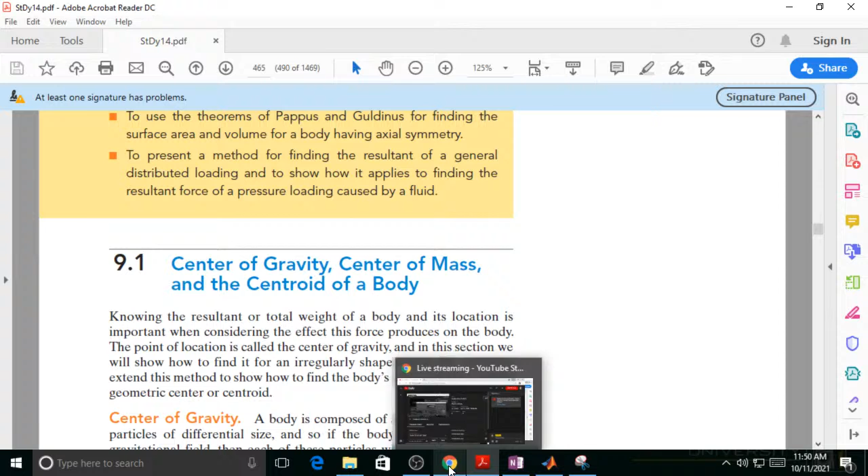I had a question about my degree works. So I need one more technical elective, but I'm also a nuclear associate, and I still need radiation health physics. Will they work together? So in that case, I was thinking of taking radiation health physics and alternate energy systems to get the technical elective, so I don't have to take alternate energy systems then? Okay, wait a minute, let me show you. Is it an engineering or technical elective you need? I think it's an engineering elective. Well, if it's engineering, it'll work. But if it's technical... Here's the deal: if you've got enough for your engineering electives covered, then what you need to do is talk to Crone, and it's possible. I need to cut off the microphone for a second. Okay, that's fine.

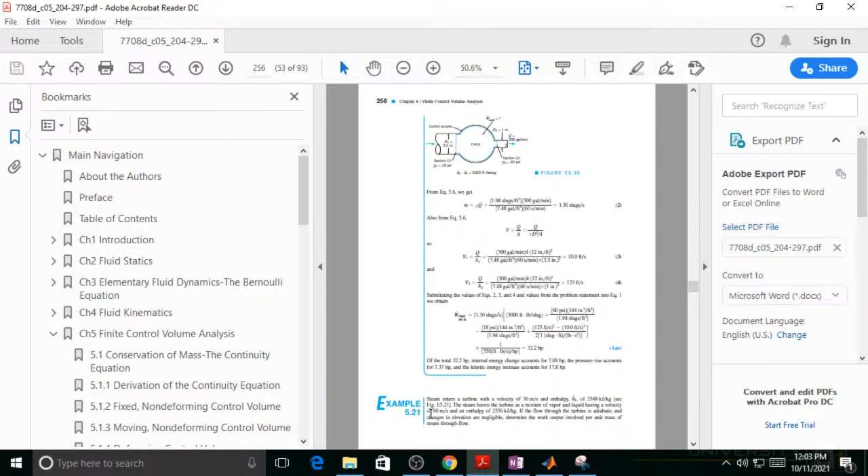I got kind of conflicting signals about when. Initially they published the final schedule as one thing, and then it got switched to something else. So my question is, what's the current final schedule?

Let's do this. Here's the exam schedule, so it can't be different than that. If you look at the exam schedule, it says blah, blah, blah, lots of blah, blah, blahs. But it looks like it's December 2nd, 3rd, 4th, 5th... oh okay, that must be Monday and Tuesday.

So I think I did it. Okay, now wait a minute. Okay, so that's online classes. I went ahead and did it for the 7th. But I may move the midterm back a few days.

I was afraid it was due this week or next week for midterm stuff. No, what I'm gonna do, I'm trying to be flexible because I don't know what's going on. I think the cases are getting better, but I want to try to be reasonable. At the same time, near the end of this week I'll start sending weekly emails with your status, what you haven't completed, and what you need to complete. That'll help people realize, oh, I better get doing something.

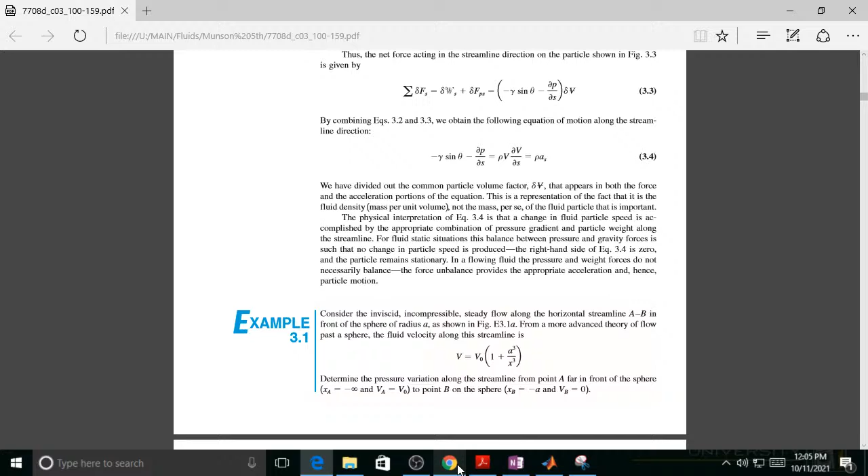I can do a problem or two, or I could tell you what I could do. I could go straight to the Blackboard site and address the problems you actually have assigned. But... oh no, don't make me do that. Oh, thank you.

This is this fall, this is... there it is. Go all the way down. I don't know where I put this at, so let me just hit 7. No, that's not it, that's the curved gates. Did y'all get through the curved gates? Okay, so let's see, that is 7. Content 8.

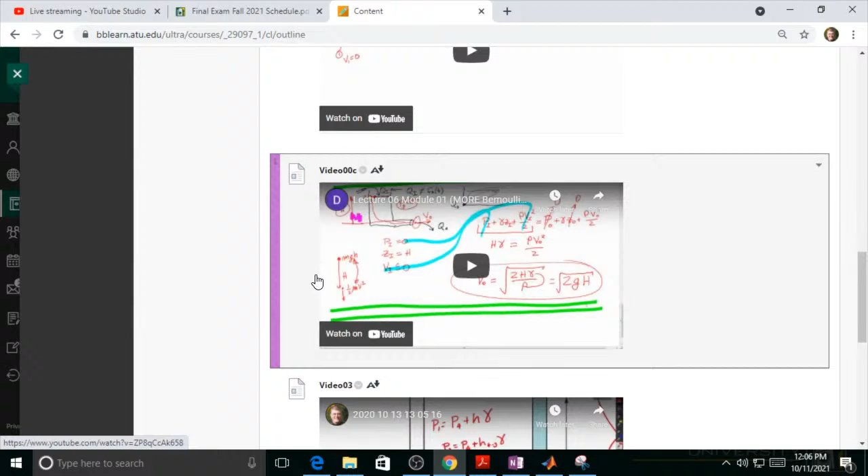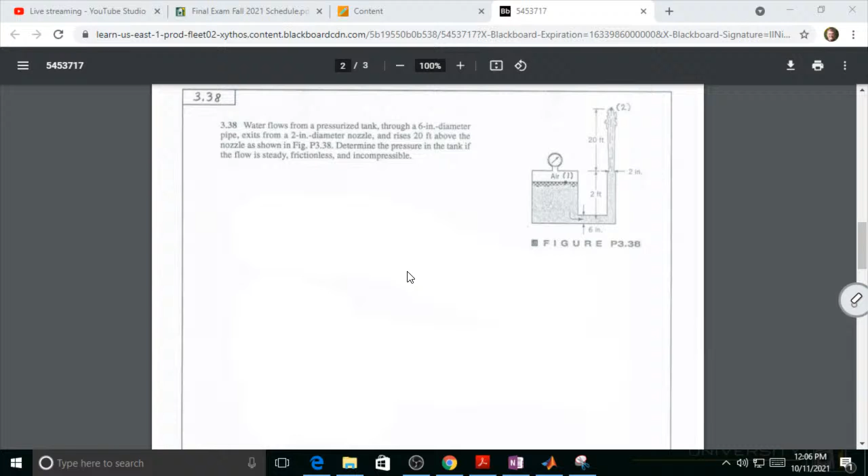Yeah, there's Bernoulli's equation. Let me go to the bottom. Look at this one, I'll just do a quick rundown. Let me see if this works. Oh it does, okay. Now how do I erase? Oh good, so instead of copying this over to OneNote, I'm going to write on this. It'll disappear when I'm done, but hey, this might work pretty good.

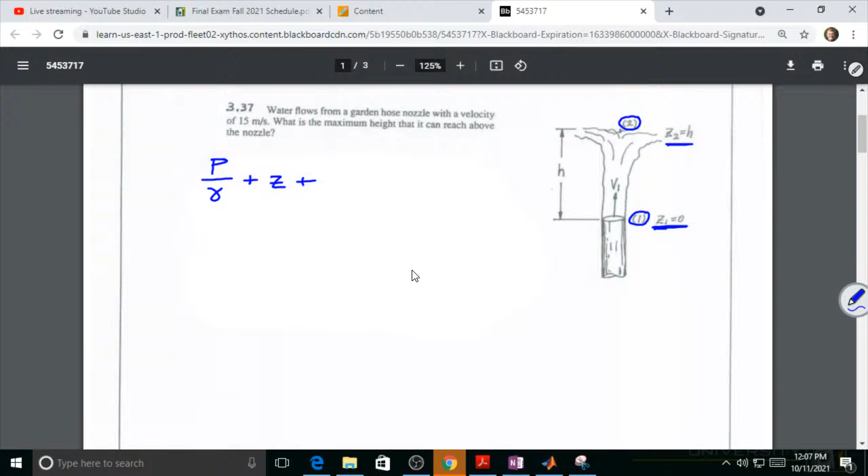Okay, so let me give you a rundown on each one of these. Of course, there's point 1, he's identified 1, and he's identified 2. The facts you know at 1, here's one fact you know at 1, and here's another fact you know at 2. So if you look at Bernoulli's equation, it looks... okay, so the ink, I can't change the thickness of the ink here. So if you write it like a civil engineer, I'm trying to write slow but it seems to catch up. You actually have 3 things to know.

Let me write it and then put the subscripts after I finish. Okay, so 1, 1, 1, 2, 2, 2.

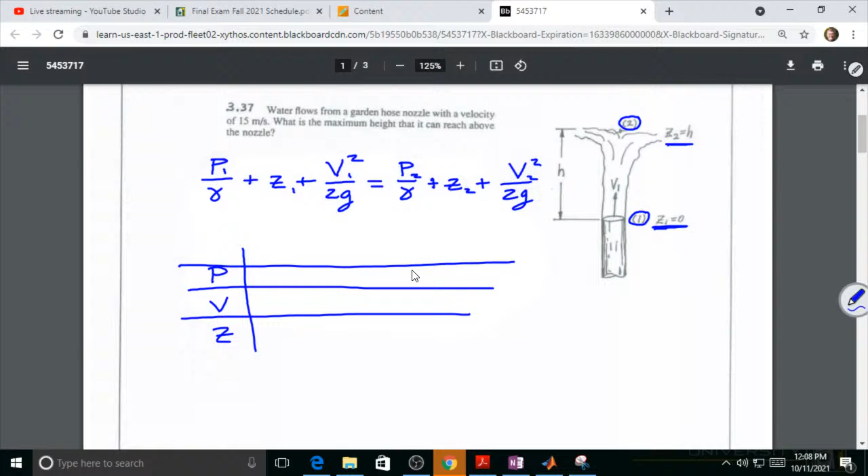So this is one thing that's kind of helpful, for me at least, and I've heard other people say the same thing. If you make a table, let's say you had 4 points in there, we'll run across one where there's that much.

If you start looking at it, number one, or location one, you do know the pressure there. He tells you water flows from it with a velocity of 15. So you do know that one, and you do know that one.

At 2, you do know the pressure. You do know the velocity, actually, but you don't know that. So in actuality, you've got one equation and one unknown. What you know about 2 is the velocity sitting here at the top is like it's bubbling around, and it's not going up or down. It kind of goes off like this. So you got that, you got this, you got that.

Both pressures are outside and exposed to the atmosphere. That's supposed to be a 2. It looks like a 2. You have that. So essentially you have Bernoulli's equation where you know this.

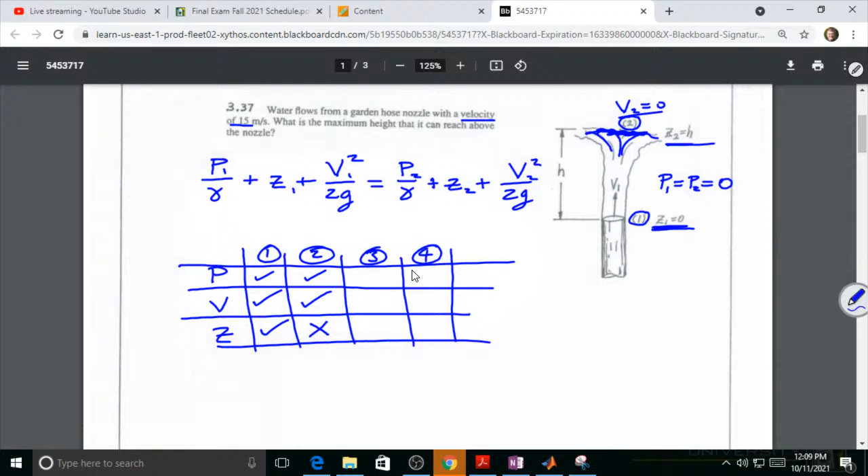That's the P1 at the time. You know that. You know Z1 because you've made your datum right here, and that's going up. You don't know this, but he told you this one. And you wouldn't ordinarily know that, except that somebody told you that. And you do know that.

So the only thing you don't know is this one, which is how high this thing bubbles up to. This is a pretty standard problem because it's essentially a fountain. How high does your fountain go? And that's pretty much it.

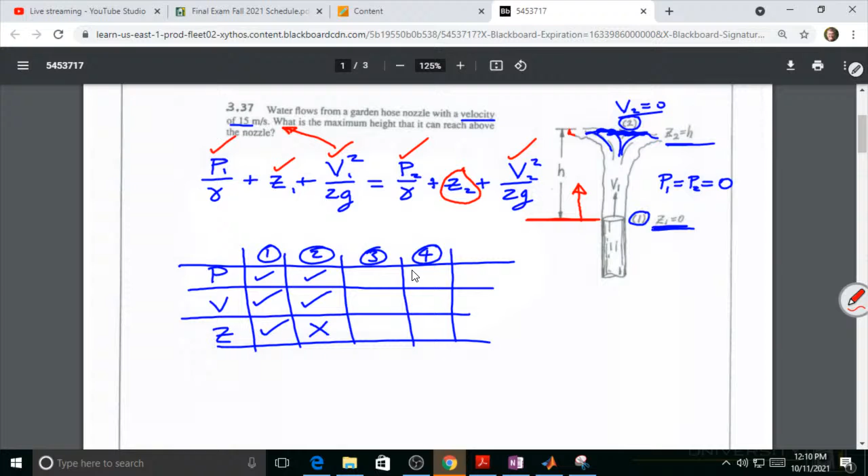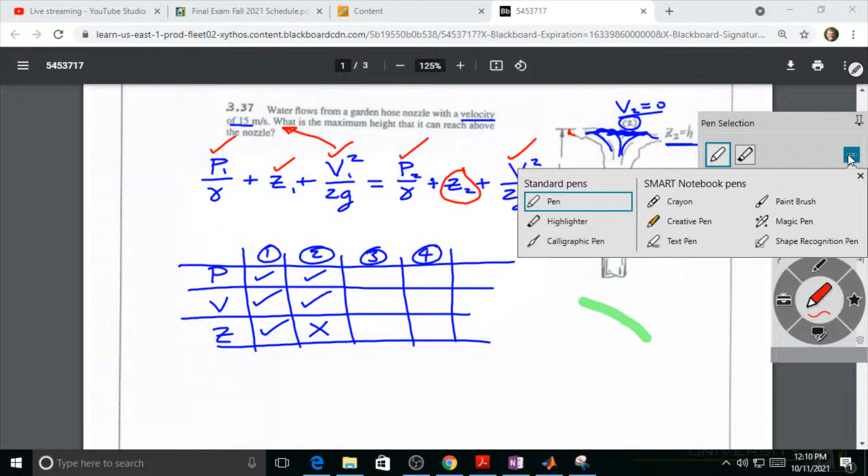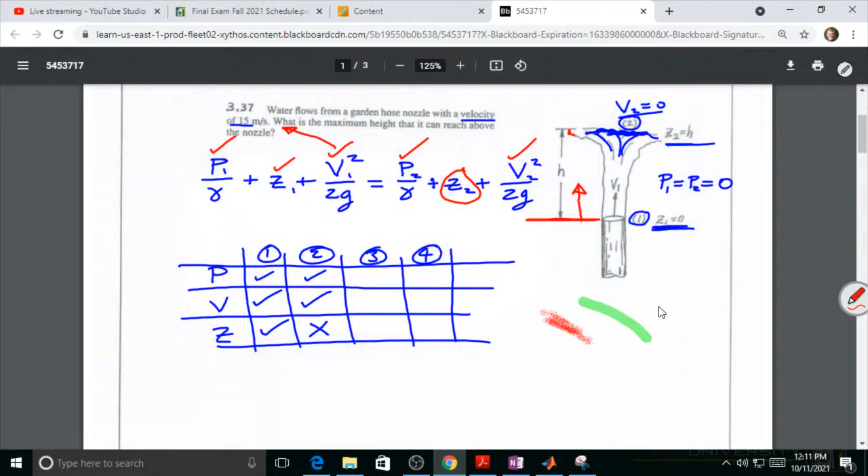What does this thing do? If I click that, what is that? Is that an eraser or a highlighter? Oh yeah, you're right. Okay, and there's some dots right there. Oh, calligraphy pen. Oh, a crayon. Oh, that's funny. We'll just stick with a pen. I didn't know it had that. And they got other things here too. Now I can't get it to go away. There you go. Can I just go to the next page? Oh, it gets stuck on the screen. Okay, so I've got to erase it. It does have an eraser here. Okay, so I'll go to the next page with a clean slate.

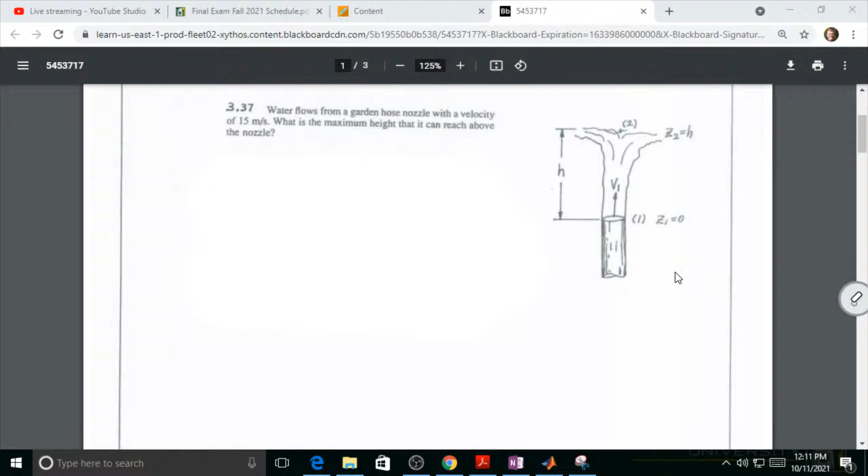So this one's a funny one. Let's overdo it. What I mean by overdoing it is this. So he identifies 1 and 2. I'm going to over-identify it and say 3.

You could do Bernoulli's this way, or you can do this. So both of these are the same. I'll say that's constant 1, and this is constant 2. But it turns out the only difference is you just multiply the top equation times gamma, and you get the bottom equation. So you can do either one.

But the key is, in either case, you'll have to know P, V, and Z. And you've got 1 and 2 and 3. So it's kind of helpful to make this table right off to see what it is you have to do.

Okay, so I haven't even read the problem yet. I know it's the section on Bernoulli's equation, so I know I'm dealing with Bernoulli's equation. It says water flows from the pressurized tank through a 6-inch diameter pipe, exits from the 2-inch diameter nozzle right there, and rises 20 feet above the tank, above the nozzle. Determine the pressure in the tank if the flow is steady, frictionless, and incompressible. Frictionless means there's no losses, so I can use this Bernoulli's equation.

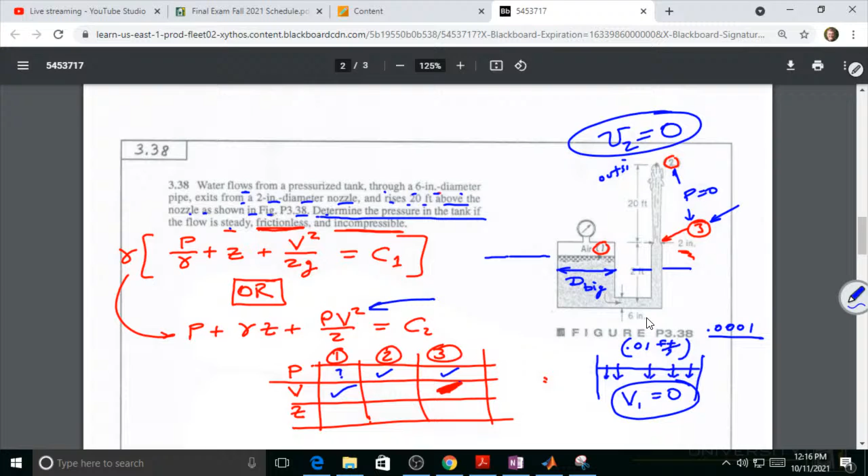In other words, you need to know, in each of these cases, you're going to have a datum. So legally, unless you assume that water is at the same height as this top—if you don't, that's going to be problematic to determine.

So, velocity at 2, I didn't need to know that. Height at 1, I see that as a problem, so I'm going to mark it PROB. Height at 2, if you set your datum at the top, you'll know that and you'll know that. So then your question is, how do you solve this?

I'm seeing this as being a little bit of a problematic situation here. Water flows from the pressurized tank through a 6-inch diameter, that's fine, exits from a 2-inch diameter nozzle, and rises 20 foot above it as shown. Determine the pressure in the tank if the flow is—that's fine, but there is something missing there, and that's the height of that water relative to the top of the thing.

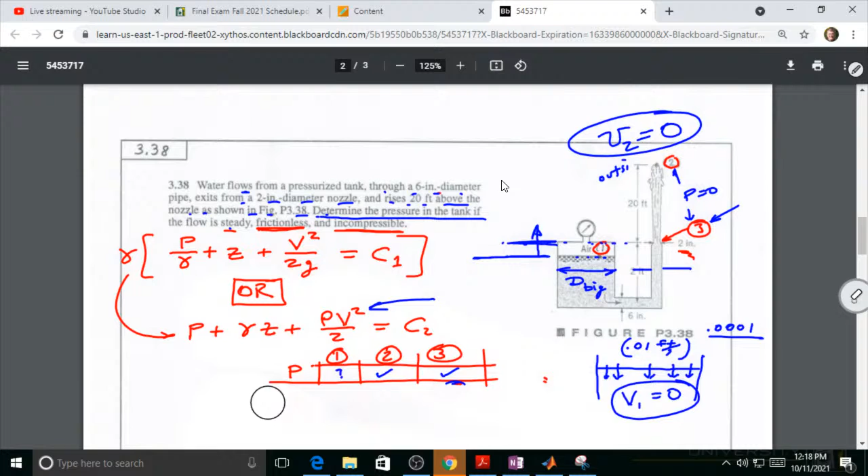Now here's—oh yeah, I gotta get, how do I get rid of this thing? Eraser, is this—no, I think the eraser still works, I think you just have to, you can't just tap it, you have to actually move it. Oh, really? Oh, okay. I think we worked with this in high school. Yeah, we kept trying to tap it in, it just didn't work, they had to actually move it.

Oh, okay, let's do this because this is annoying to me. Okay, so first, let's get this, let me write down and see what he says. He says pressure 1 is that.

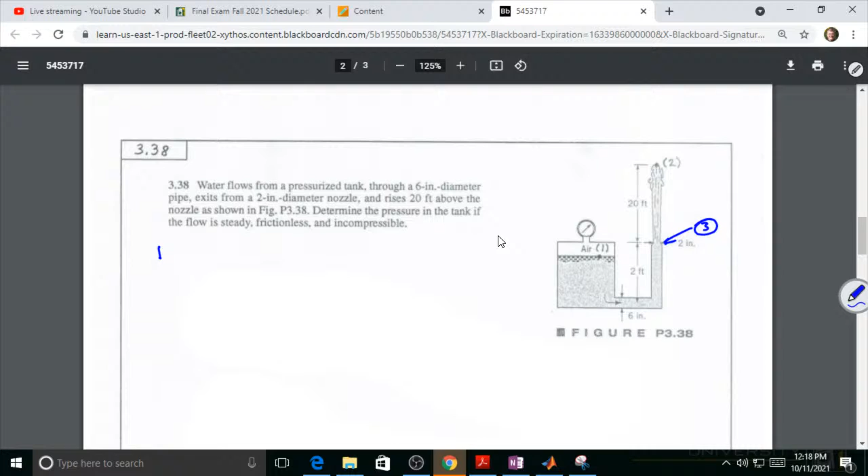Okay, I don't know how he arrives at some of this, but given the information, I'm going to work between spot 3 and 2. P3 over gamma plus Z3 plus V3 squared over 2... do I put the G? Usually I put the G after, but anyway... V2 squared over 2. I'm not organizing this well, sorry, I interchanged values around. So the P3 and 2,

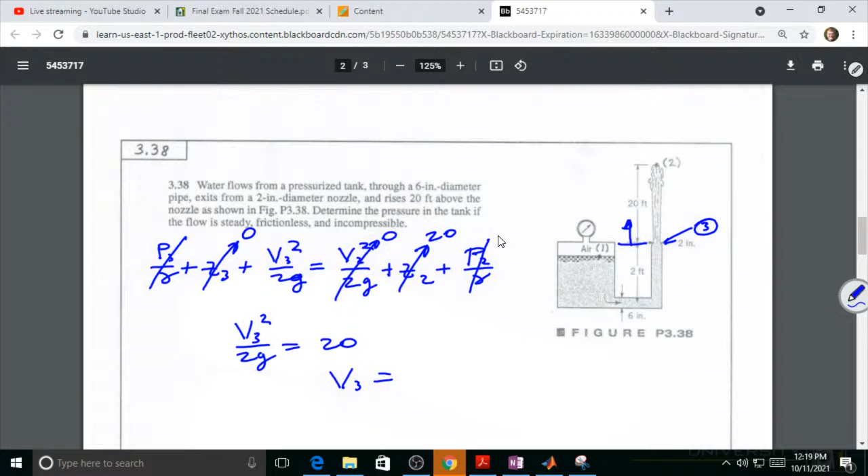they're not there. If I set the datum here, then this is 0 and this is 20. If V3 is something, V2 would be 0. So what you'd have is V3 squared over 2G equal to 20, or V3 equals the square root of 2GH. Take a look at that for a minute and you'll think to yourself, hey, wait a minute, that looks familiar somewhere in my history. Now H is that 20.

Think of this being H. Imagine if you flung a marble straight up and it reached the top of its path and is about to come back down. Your kinetic energy, 1/2 mv squared, equals the potential energy mgh. The m's cancel, take the half over, and you get v equals the square root of 2gh. Remember we were talking earlier that this is nothing more than an energy equation. So suddenly you start to see the evidence of that. So what does that tell you? It tells you V3.

Hang on, let me get this, I'll go ahead and take it out of there. Okay, once you have V3, technically you do have to know that elevation. Now you can assume what you want to, that's fine, but that doesn't mean it's the correct assumption.

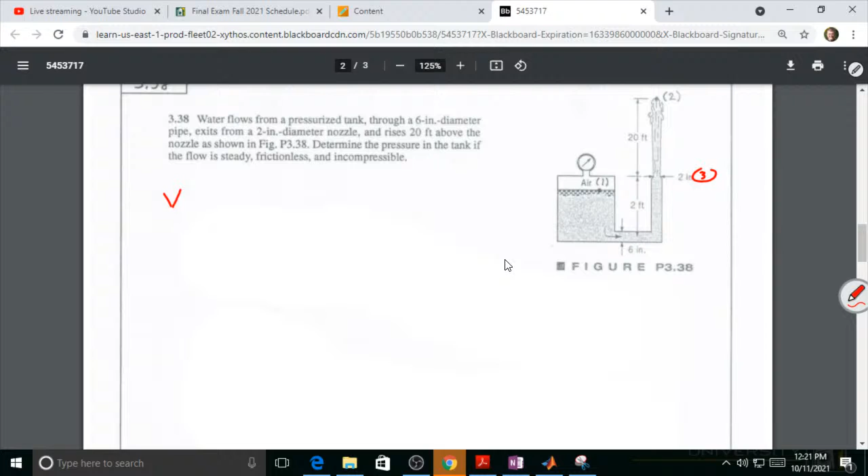So, here, I'll make myself some extra space. So what we find out is V at the exit, or V at 3, is equal to square root of 2GH, or 32.2. H was 20 feet. That's going to be the velocity at this exit right here.

It really doesn't matter because you still have to come back and say this. Now, it may not amount to much. P1 over gamma plus Z1 plus V1 squared over 2 is equal to. Now, you can write it all the way to the top, it doesn't matter. You can write it from P2, Z2 plus V2 squared over 2G, or you can write it from P3, Z3 plus V3 squared over 2G.

The fact of the matter is, you've got to know this distance. So I'm just going to make it up and say that this distance is going to be D.

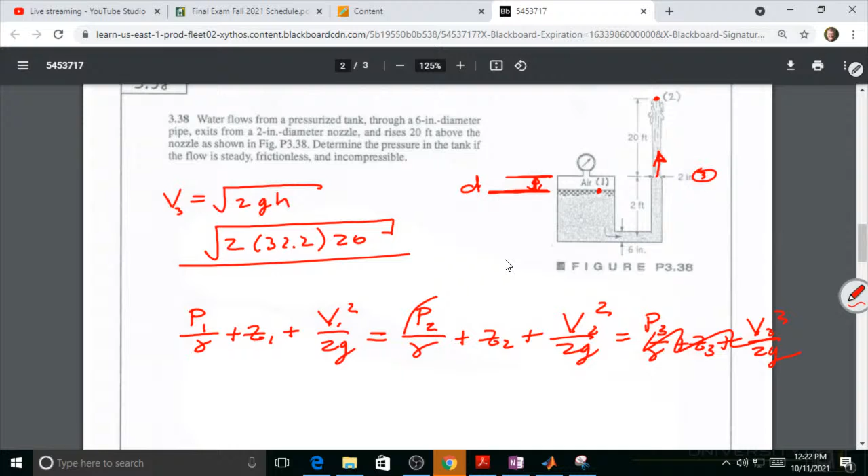And what I'm going to do now, I'm going to write between 1 and 2. And so I'm gonna forget 3, and I know I found 3, but I'm gonna forget it for a minute. Because I know the pressure at 2, the velocity at 2 are 0. So if I make this datum sit right here, then Z1 would equal 0, but Z2 would equal 20 plus whatever that little distance is.

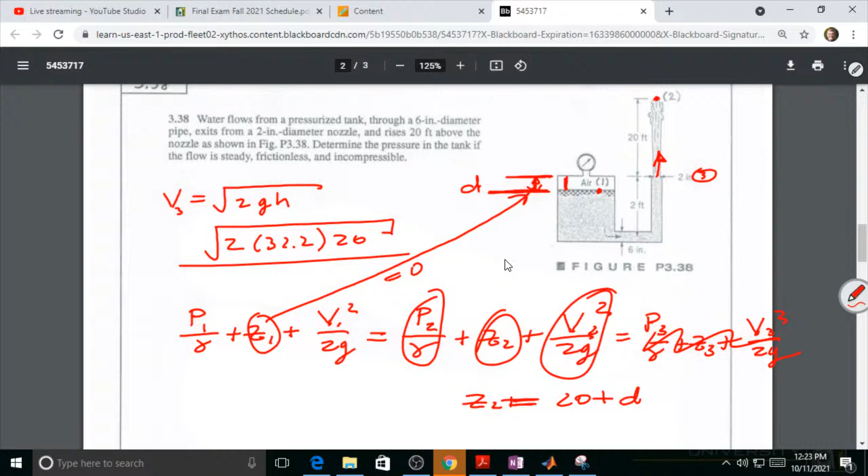Okay? Sorry about that. But then the question comes up and says, okay, what is the velocity of this face as we're draining? Very small, so it's going to go out to nothing. So then what we're going to see is we're going to say P1 is equal to gamma. Okay, so the only terms I got left that are not 0 is that one and that one.

Gamma, 20 plus D. This is really unfair because you really need to know that D, but assume the D is tiny, I don't know. Gamma is 62.4, and if it's 20, I mean, I hate that. What's 62.4 times 20?

1248. Yeah, so there's a little bit of a problem with this problem, and that is that geometrically, it's not exactly correct because he's assuming that this water is at the same height as here, but he hasn't drawn it that way.

And so technically that D needs to be in there. Say it's a foot. If it's a foot, then it's 21 foot. Hey, where did the thing go? There it is, I can scroll. There it is. So if it's 21 foot, then it's bigger than 1248. So I'm not criticizing, but 62.4 times 21 foot would be 1310.

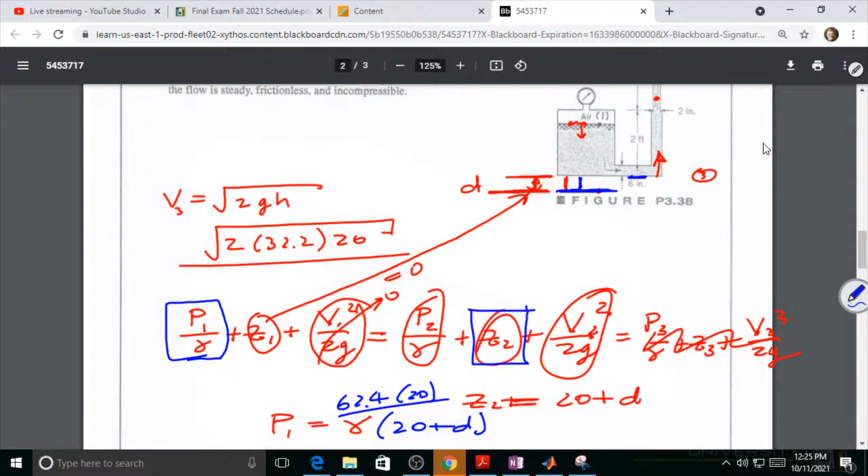Maybe, because we have a bunch of stuff with diameter, like it's a 6-inch diameter pipe that goes into a 2-inch diameter pipe. We didn't do anything with that. Yeah, it's just—

I think now this happens a lot with these problems where somebody drew it and then the edition changes and the picture will change occasionally. This book dates back to the 80s, 1980.

So, and this is—it's in the, okay, is it in the 8th edition or is it in the 9th? It's either the 8th or 9th edition. I can't remember. I vividly remember the 8th edition cover. But I think they did come out with the 9th edition and I can't. And so what's funny is there'll be a problem, it'll disappear and it'll reappear a few editions later. So it's a grand shuffling of a deck of cards.

So I hate that, but if you're being meticulous, those need to be drawn at the same height. Oh well. It even says air up above the water, so it's like—you assume it's full and there shouldn't be air, but yeah, the figure says air.

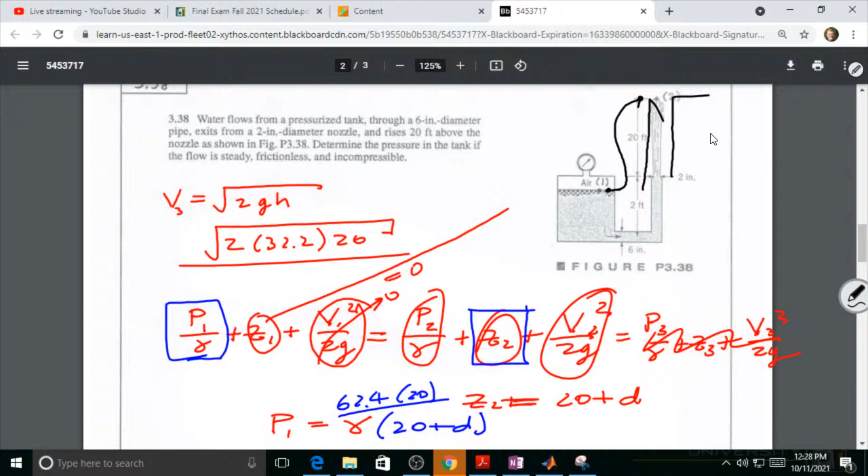Or, this little nozzle needs to be dropped down. I don't know, I don't know. But the fact of the matter is, the way it's drawn, if you're writing Bernoulli's equation between here and here, you've climbed that distance, not that distance. So, yeah, these are intricacies that happen on some of these problems.

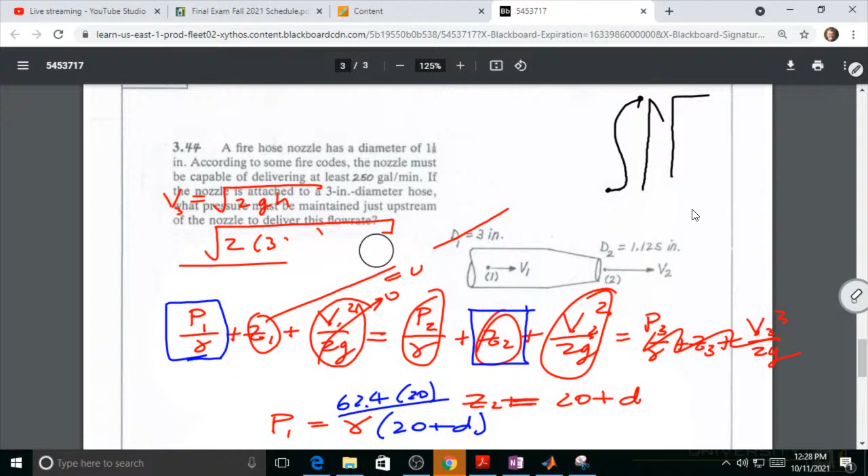Let's see, this one is not as—it doesn't have any height issues.

There's no height issues here. So in this one, it's just kind of straightforward. You got a 1, he's already identified 1 and 2 for you.

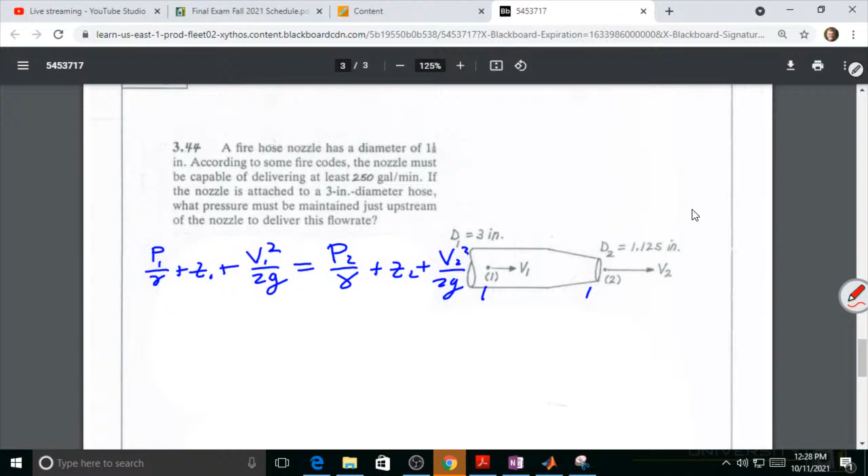P1 over gamma plus Z1 plus V1 squared over 2G equals to P2 over gamma plus Z2 plus V2 squared over 2G. So then you have to identify things. Well, first, the elevations are the same, so you can just X those out.

The next thing you got is the diameter's changed. So what you got is A1V1 is equal to A2V2.

Now, he gave you diameters and not areas, and it says diameter, so I'm assuming pi d squared over 4. So you get pi d1 squared over 4, v1 equals to pi d2 squared over 4, v2. The pi's cancel, the 4's cancel. So what you get is d1 squared v1 is equal to d2 squared v2.

You can either, scratch that, say v1 is equal to that, plug the v1 in here as being v2, but d2 over d1 squared—but you didn't have to remember that it itself is squared, so it becomes a 4th.

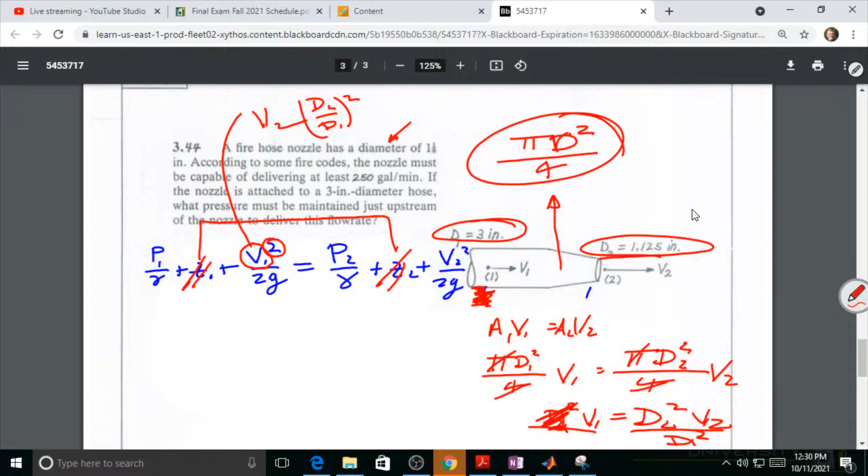Then let's see what else he says. The nozzle must be capable of 250 gallons per minute. If the nozzle is attached to a 3-inch diameter hose right back here, so the pressure 2 at the exit's nothing. So it's squirting out onto the ground, I guess, or up against the building. Okay, so if it's 250 gallons per minute...

Then a gallon is kind of a volume measure. So 250 gallons per minute, and 60 seconds in a minute. I don't know how many gallons are in a cubic foot, but I think it's 7.4 or 7.48 or 7.5 or something like that. And so you can convert this to cubic feet per second.

Once you've got that, you can turn around and get V1 and V2. The only thing you don't have is the P1. So since he gave you the flow rate and the volumetric flow rate, you can turn around and extract out V1 and extract out V2, put them in, everything else is clear, and you get P1 out of it. So that's a little bit more straightforward.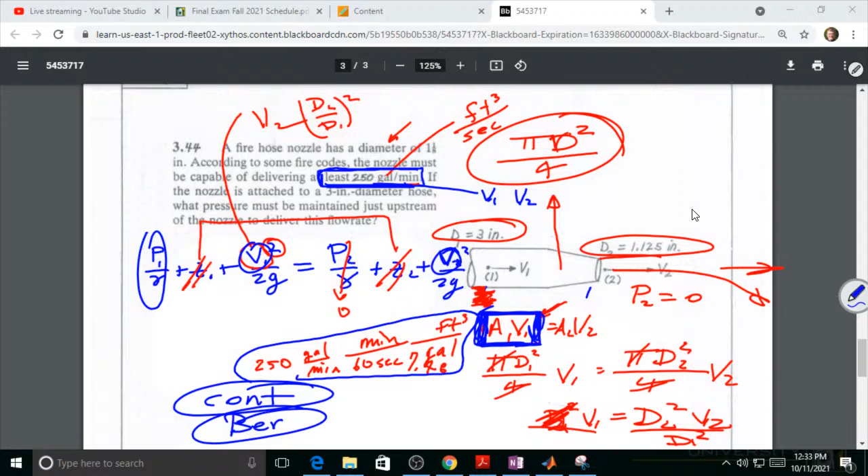So, all right, so what's the next one? Well, that's it. Did I only give 2? No, there's a third one. No, I did 3—oh, I should have given more. But I'm not going to go back and add them. Okay.

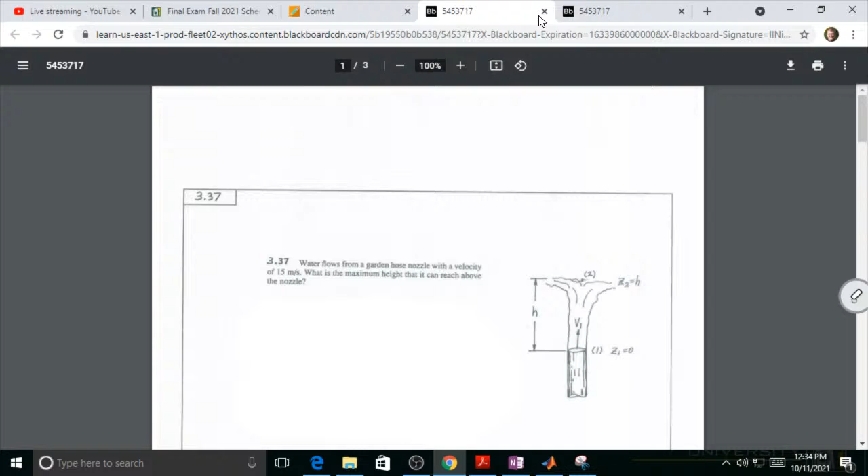Okay, so let's hit whatever the next section is. This is the content for 8. Let's hit the content for 9. Wait, eight and nine, yeah. Well, wait a minute, that was—okay. You know, I think that was the week I set everything up and I had midterms running, so that's why I combined those. Okay, so let's see, 8, 9, 10.

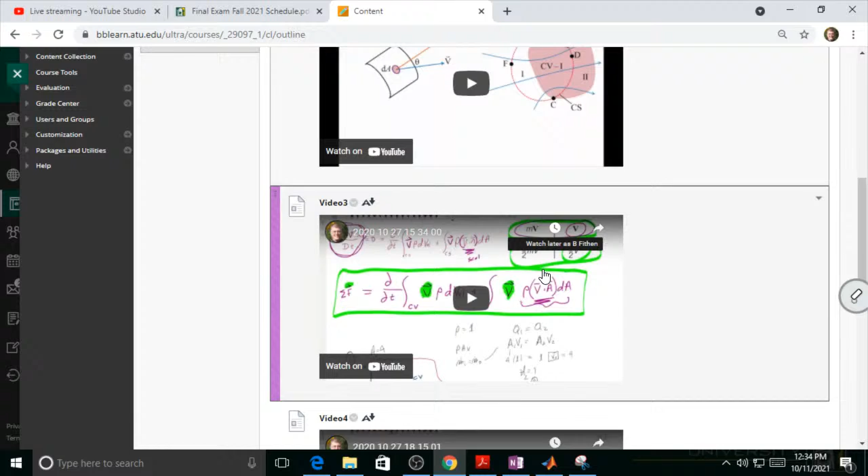This is the sum of the forces, the momentum thing. So...

Okay, let's hit the first one. Okay, why is it not going up? Come on, there you go. So there's a lot of junk in these.

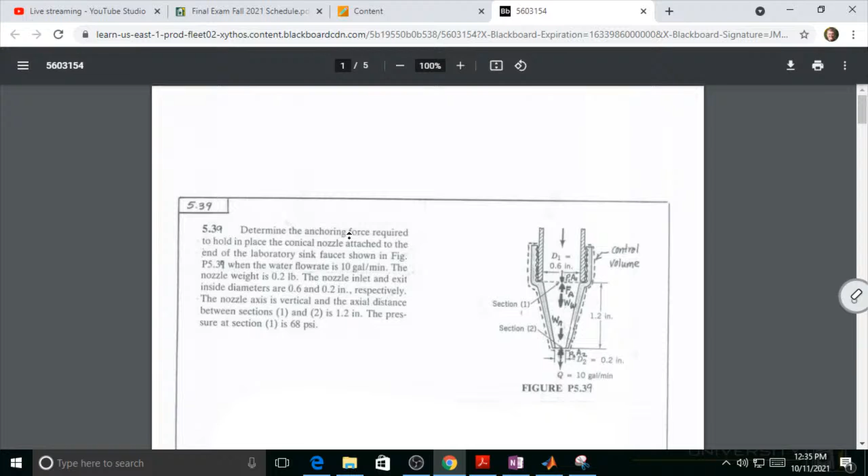Okay, so it says determine the anchoring force required to hold in place the conical section attached to the end of the laboratory sink faucet shown in the figure. So to me, it looks like it's only in the Z direction. Well, you know what, let's call this the Y direction, and we'll make this positive.

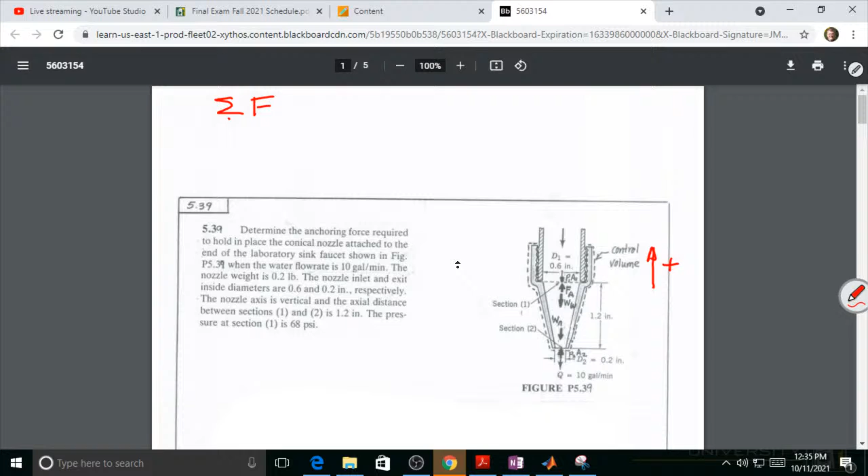So the way this works is you do the sum of the forces, and in this case we only have Y, which is equal to the sum over the control surfaces of Vy, because these indices have to match, V dot N area.

That's the M dot, with the positive out and negative in. The reason it's positive out and negative in is, let's say you put the surface right here. Normal points out, velocity goes in. The dot between those two means that the inlet has a minus sign.

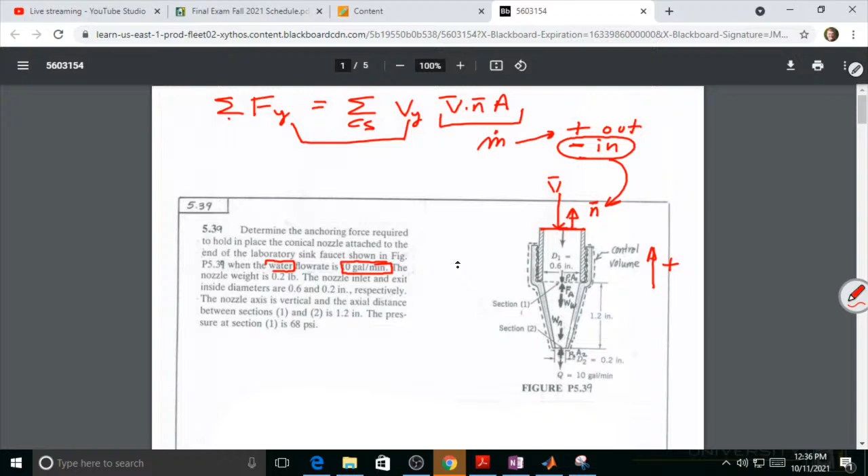Does he give us... oh, well, okay, there you go. He gives us that. He tells us it's water. So what I'm getting, oh, I forgot the rho right there. Sorry.

So what we have is, V dot N area, that will essentially be translatable to the 10 gallons per minute, but you'll have to change that to cubic feet per second. Then you have density. The density of water is 1.94 slugs per cubic foot.

And then what you've got is just Vy. So in this particular case, it looks like the water's flowing down. So if I take this to be positive, then I have to do it the same on both sides.

Does he label them 1 and 2? Oh, he does. Here's 1, and here's 2. So in section 1, his velocity - it's hard for me to see, but his velocity on both sections is going to be going down, or minus. So as long as you keep up with that and keep the signs, I guess here, usually in statics they'll have that.

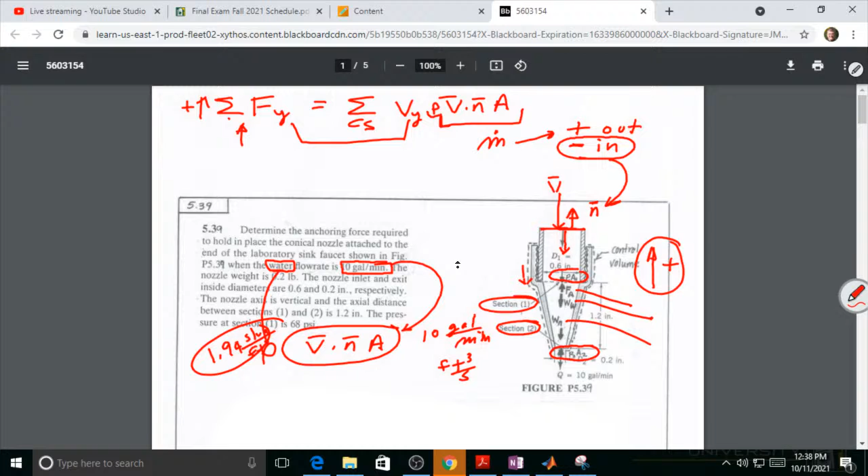So if you just add them up - okay, I have to be careful because I've designated up to be positive, so I'm going to go from the bottom to the top. Weight of the nozzle, weight of the water,

force anchoring - I'm having a little trouble reading this thing - minus P1A1. So I took care of this one, then that one, then that one, then that one, then that one: 1, 2, 3, 4, 5. Okay, and then I've got my inlet and my exit.

So now I got all this crap in the way. Then let's go back. I don't know which one to do first, the inlet or the exit. I do the exit first because the exit goes out. Okay, the velocity at the exit is going in the minus direction.

And I'm just going to say E, because the velocity of the exit can be determined from the fact that rho, or I could say VA, has got to be equal to 10 gallons per minute. And so I can get the area down here and get the velocity out of it. So I'm going to say that.

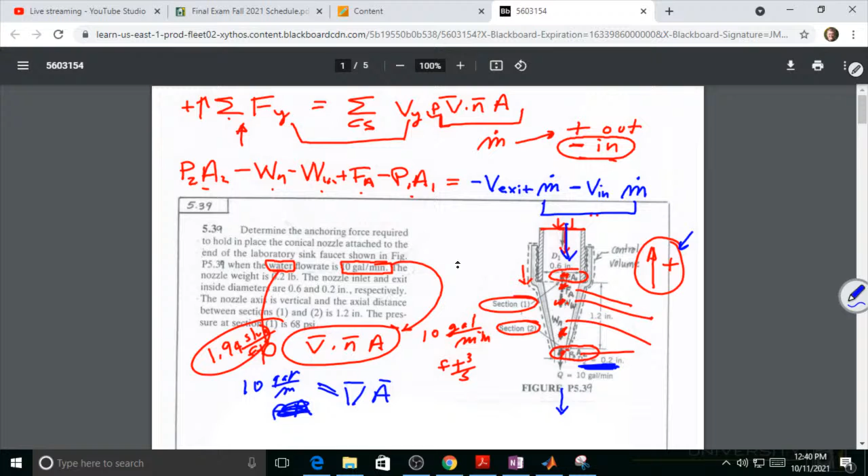Now the question is, okay, the nozzle inlet exit - determine the anchoring force required. That's what you're trying to find. So he's got to give you this and this. The section 1 pressure, he gave you this. I think he's going to tell you the exit pressure is 0. Yeah, so I think the exit pressure is 0 here.

And you've got the weight of the thing. Do you see the weight? Okay, the nozzle weight. And then you've got to have the volume of water in there, but I don't see - does he tell you how much water is there? I don't see that. So there may not be a...

So in essence, you should know everything on the right-hand side. You should know everything with the check. You don't know that one. And that's what you solve for.

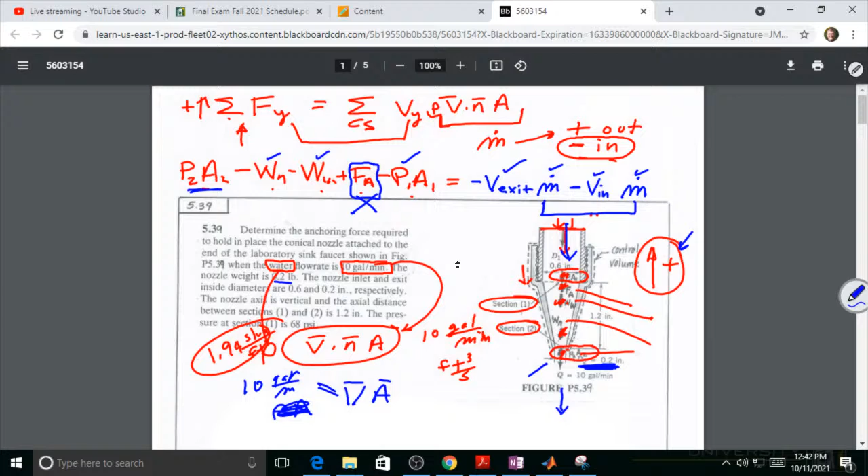So, apparently they want to get in here. So I'm going to let them.